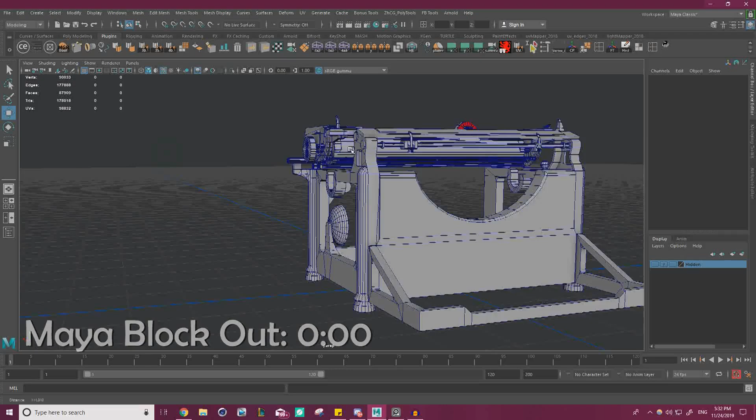We're going to be continuing along creating this typewriter here. It's been a bit of a hot minute since I've recorded the last episode, maybe about a week or so. I did mention in the last part or two that I was starting some contract work that was eating up quite a bit of time, so this is more of a side passion project to bring you guys this tutorial. But it's good to be back.

I had to look over all of my notes on this to remember exactly what we were doing, but we're going to be creating these cylindrical end pieces. They're a little bit different on each end, this side being complex, the other side being very simple. We should be able to get through all of that in this part, so this part might be a little bit shorter, maybe not, but that's the goal. I'm also still a little bit sick, mostly just a bit of a cough, so if you guys could excuse me for that. Mostly over it though.

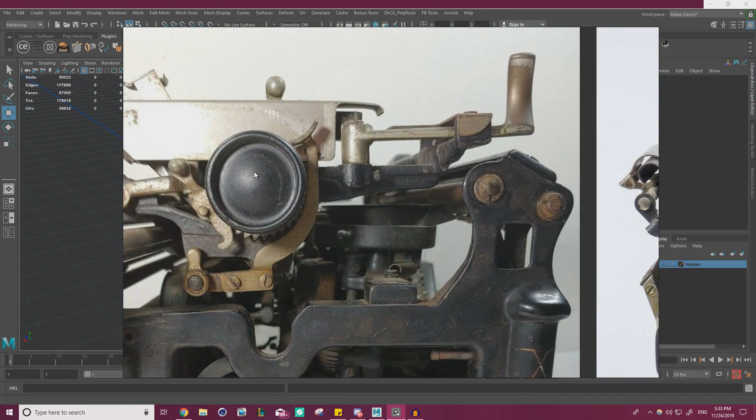So let's go over exactly what we're making. This end piece here, they all seem to be slightly different. The most common one is to have this sort of sharp gear shape, this Coke can looking thing, this ribbed knob, and this end piece - that's definitely the most common one you're seeing here on the end. And then the other side, this is just this kind of rounded knob with the spiked gears.

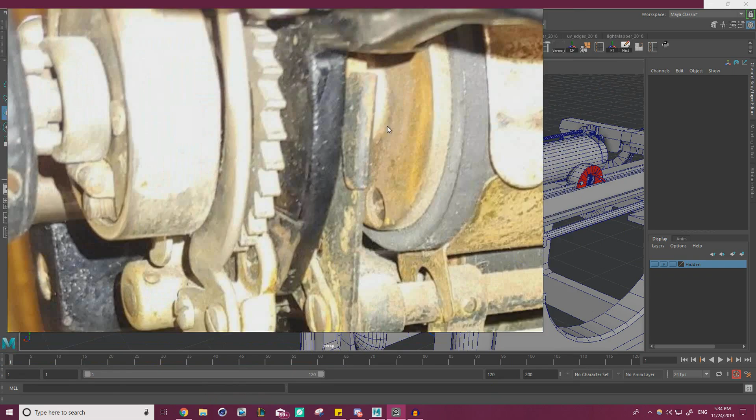We're going to be starting with that spiked piece. The challenging thing is there really isn't any angle that is focused on that specifically, but you can see it peeking through in all of these, and we have little hints as to what it is. This image is really good because it shows us there's an outline with these spikes, but it's hollow on the inside. I was trying to find other reference to confirm that, and you can see it here, how there's sort of a gap. So we're going to be trying to work with that in mind. We can also see the positioning of it relative to the other pieces.

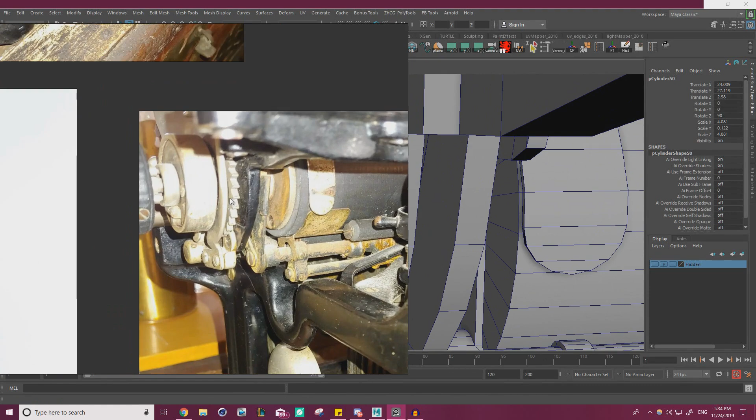So let's go ahead and make that. We can start with this placeholder piece here, and start with this guy. It's definitely positioned between these two things underneath here, which is nice. So I'm just going to duplicate this piece, leave this right there, and try to mirror the thickness of it. It's definitely a pretty narrow piece overall, about that thick or so, and positioned right here.

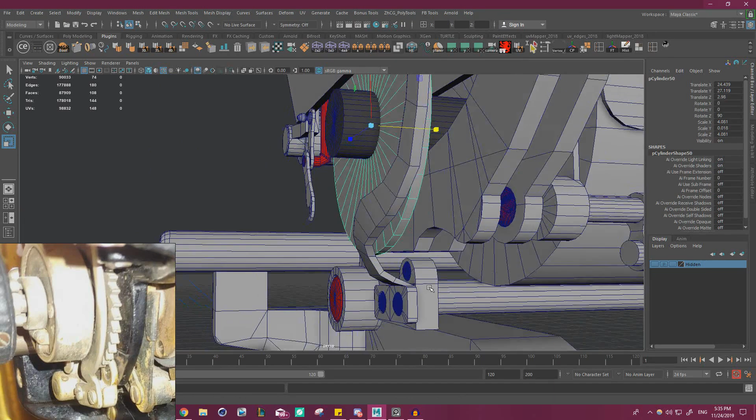Just trying to get the scale of everything. Might as well delete this guy since we don't need it. Let's get the scale of it relative to everything. Honestly, based on where that is and how this is lined up, it's already pretty to scale how it is now. I think with the spikes hanging out, we might want to shrink it down a little bit. And then there's that gap that we discussed.

So how exactly are we going to connect it? Well, first of all, I'm going to grab all these faces and extrude, just extrude these faces in, trying to get that gap there. So it seems like it's deleted like this, like it's just a ring. Where it gets kind of tricky is how does that then connect back to here? We can focus on that afterwards. First, we're going to have to fill up this hole.

I'm just going to select this loop, shift select this loop, and then we can shift right click, bridge. It seems to have not bridged correctly - this will happen from time to time. To fix that, I find that if you just bridge one edge and then go for the full bridge like so, it's smart enough to realize how these are connected. It'll sort itself out around it. So that's how I get just a ring.

So how are we going to get these sort of spiky parts? There's many ways we could do it. One way I would try is maybe to extrude these faces out, and then this might be very cumbersome, but if we then take every other edge and extrude it in - no, that wouldn't work. Let's think about this. To get sort of a spiked look, we could extrude out, and then where it says keep faces together, we can turn that off. I want to see if offsetting does anything. Not necessarily.

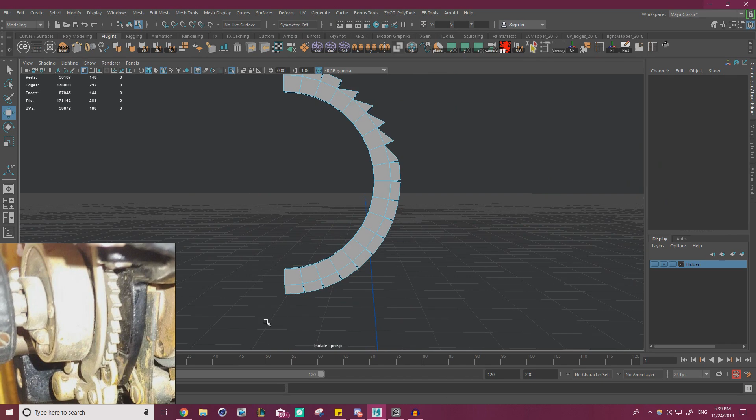So this is exactly cut properly, I think. I guess we'll soon find out. Just continuing along. And this is why using our pivot to our advantage is so important. Just vertex snapping it and moving it down.

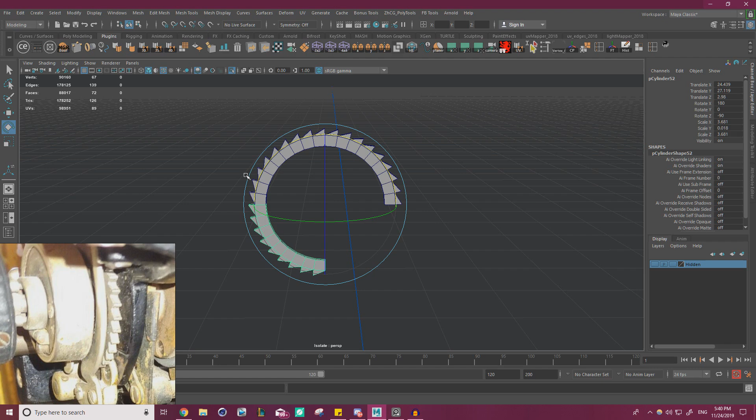And of course we got to merge our vertices. And then essentially we can just duplicate, rotate, duplicate, rotate, duplicate, rotate. Mesh combine on all those guys, merge all those vertices together, and we successfully got that sort of spiky shape that we see over here.

Even might want to make it a little bit thicker. We got pretty lucky, it seems like the amount of spikes is pretty accurate. I was just trying that out and it kind of worked out. But now it's a matter of how do we address this gap, because it obviously can't just be floating for no reason.

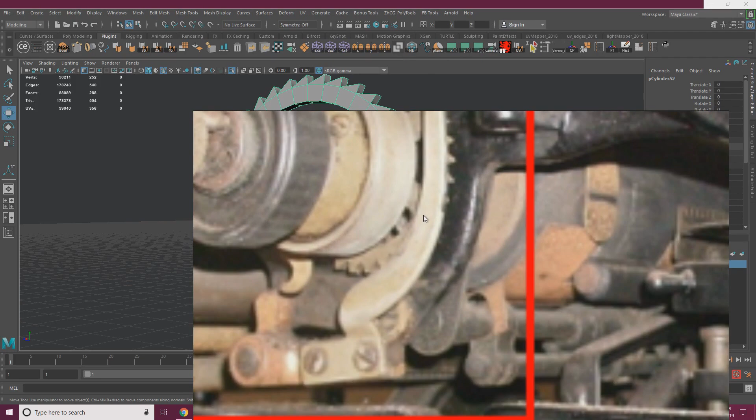Let's see if I can find that original reference. Yeah, it seems like it connects in. Maybe it's like every 3. This part, we're going to have to take some creative judgment to see how exactly it would come together. I'm thinking maybe I'm just doing a pattern of 3 on, 3 off.

And if we extrude that in, we sort of get that kind of shape, right? It does look pretty bad to do it just like this. I don't like these big triangle shapes.

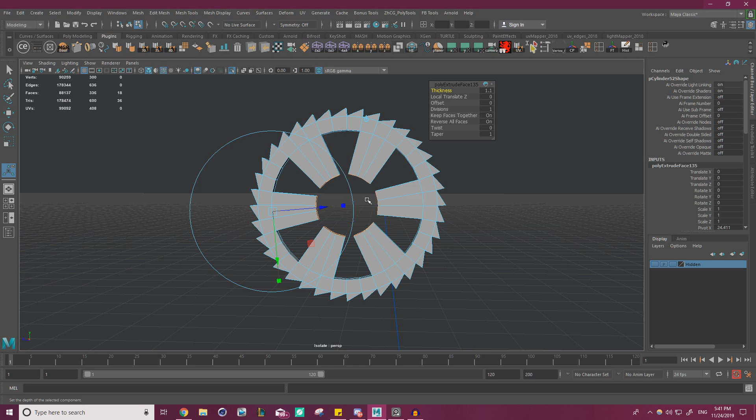Let's try that. I then went ahead and deleted those faces. I want to see, can I bridge these across? I can. Okay, this is starting to look like something I'm a bit happier with. If I connect all of these.

It's more of a proper ring. I can tell it's obviously not as smooth because we're missing some of these edge loops, but I like the concept of this more, at least. I'm just going to go ahead and put a cut in the middle of all these, just holding shift to get it to snap right to the middle.

Cool. And then if we grab these, we should be able to scale them uniformly and bevel them, which gives us the same circular shape.

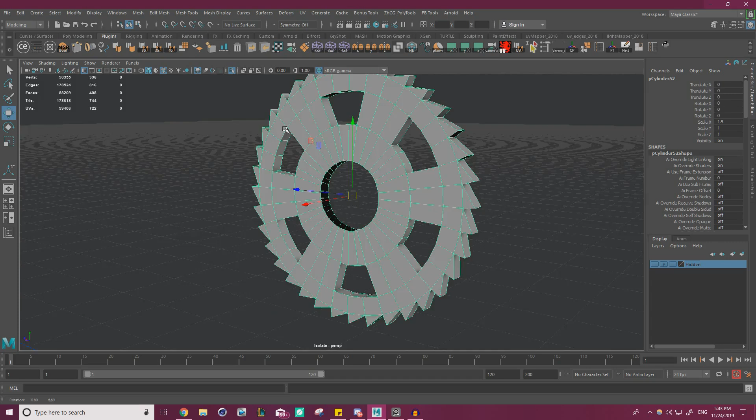Cool, from here all we have to do is extrude in. We can get out of isolation mode and just sort of cup it like so, and bridge it all across like we did at the start.

So that's how I kind of came up with that gear idea. Like I said, we don't have any super clear reference other than there's some sort of connection piece here. It might even look like it there, but there's definitely a gap and it's rather thin. So how accurate is this? It's hard to tell, but I was looking for a while for some proper reference.

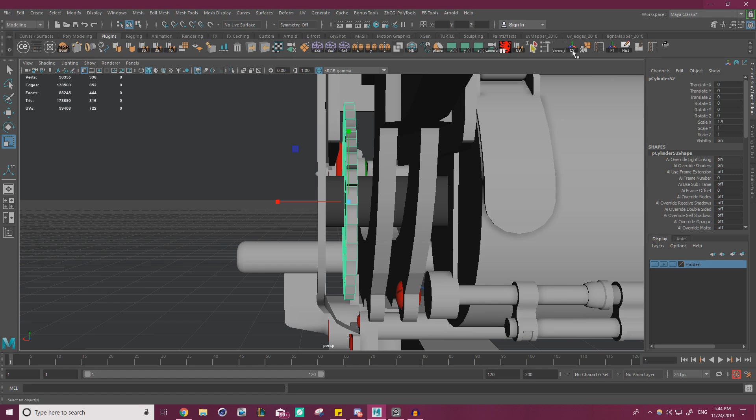And considering how hidden it's going to be, I think that's going to be just fine for this specific piece. Center pivot on that, freeze transformations, delete history. Now we're on to this one. Let's see if we can find some more reference. It's definitely a much simpler shape.

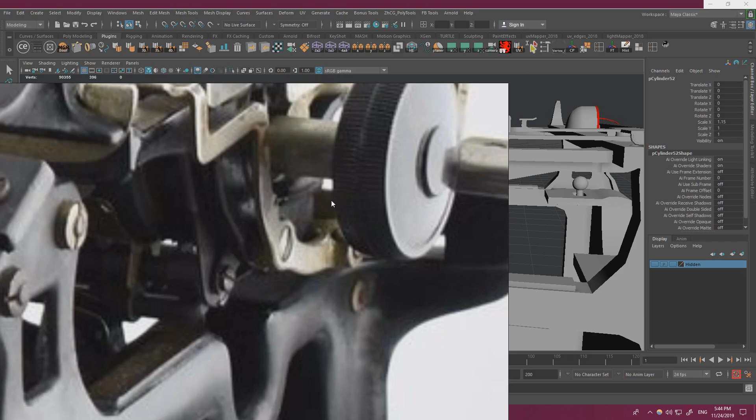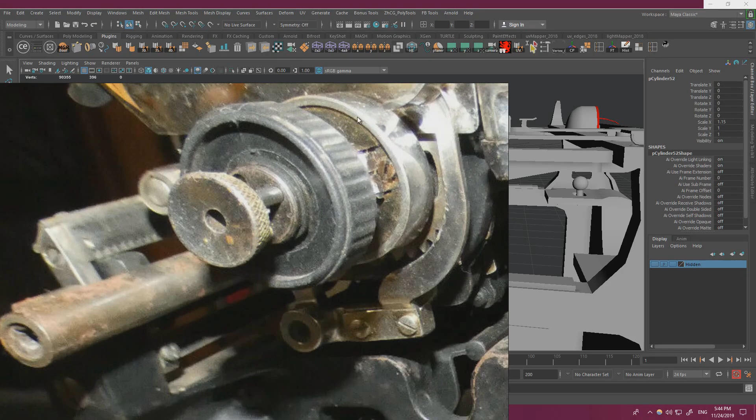Yeah, so it's basically just a cylinder with some bolts in it. I just kind of wish I could see the other side of it, but I guess that's not going to happen. We also know that it is sticking out outside of this guy, and because of that, I might even grab this piece and pull it out a little bit.

So let's go ahead and start making it. Maybe it won't even be a big deal that we can't see the back side of it because it's pressed up against here, and the only way you could even get your camera in there would be to jam it right here, which isn't really going to be possible.

So I'm going to want cylinders, a cylinder that's equal to this, so I'm going to be using our good old favorite Smart Duplicate Face. So we have this guy to work with. I'm going to turn the color back to the original and scale them up a bit. It seems like all of these pieces are more or less the same scale.

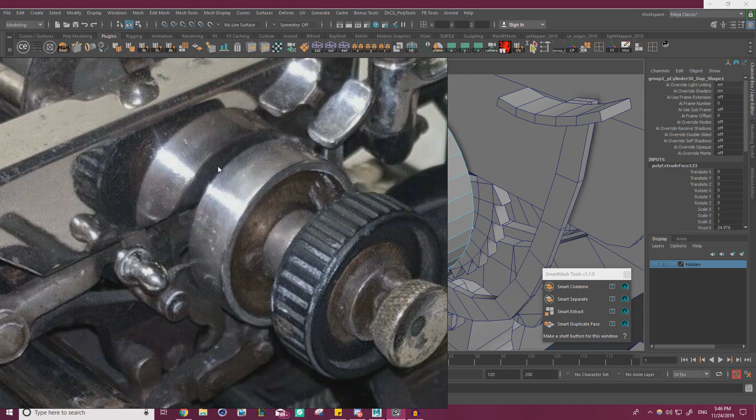So let's try and match this more or less. We're going to need to extrude it about this thickness, which looks to be about so.

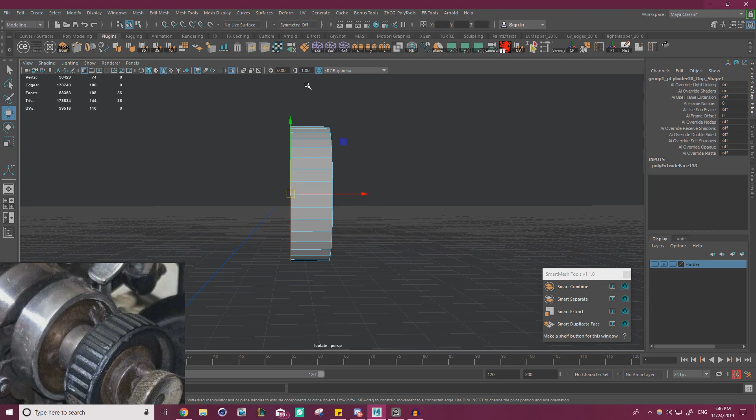I'm going to isolate it just to make sure the back, yeah, I thought so. Whenever you're extruding from a plane or a single face like that, or something that isn't three-dimensional, sometimes you get these, so I'm just reversing the normals because you don't want it to be staying black like that. It's going to give you some funky results later on.

The next step of this is to sort of punch it in a little bit. So I'm just selecting these faces on the front. Once again, to do that, I'm selecting one face, shift period to grow selection, and then just deselecting the extra stuff there. Control E to extrude. We can then just sort of scale this in with the handles.

Going to extrude this in, trying to mimic about how far deep that is. Doesn't seem to go in too far. About so, and then it seems to sort of cup up. It's like concave, like so.

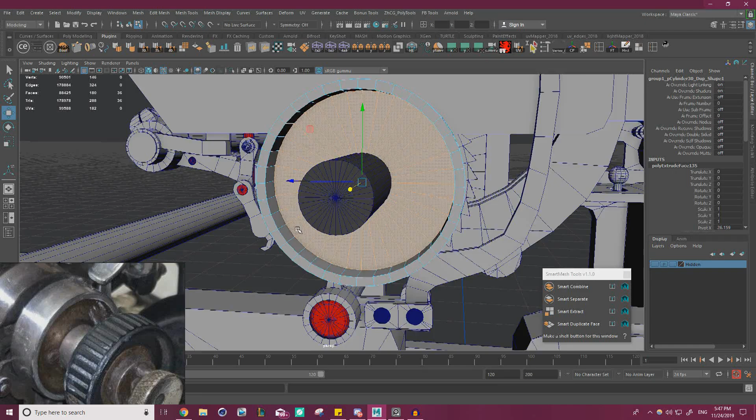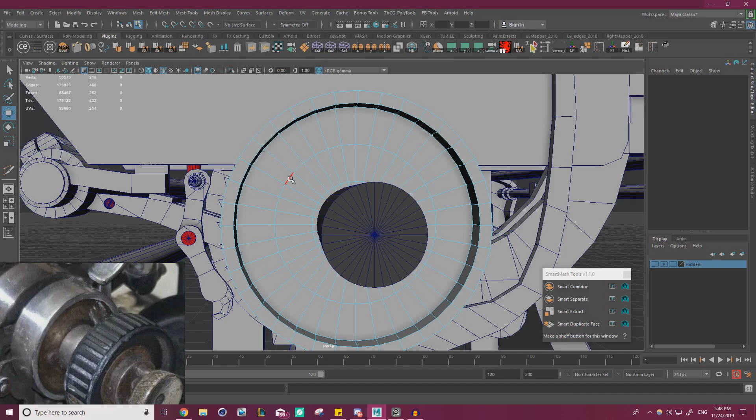So maybe the best approach would be to put it not as far as I'd initially like, but then once again extrude like so, and put a cut in the middle. This way I can pull this back so it sort of dips in a little bit. Maybe even pull this one forward, and then just bevel this guy. Maybe add 2 segments in there.

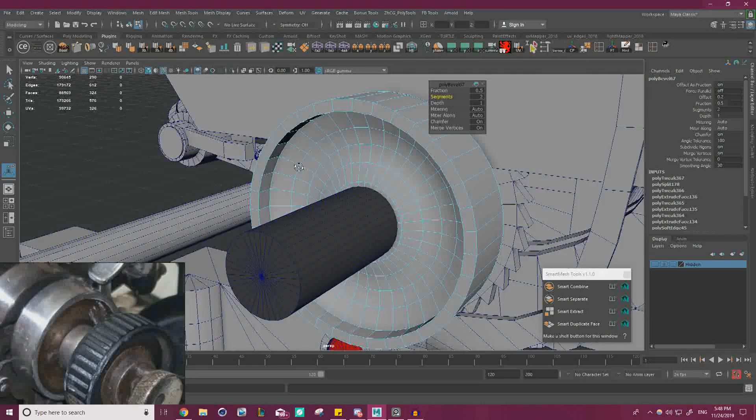Just going to play with the distance on all of this stuff. Yeah, that seems to match it pretty well.

I am going to want to hollow this part out. It seems like this tube is going through it, not pressed up against it. So I'm going to select these faces, Control E, extrude this in, and then holding Shift, I'm going to push it back, which is just essentially extruding it back, like so.

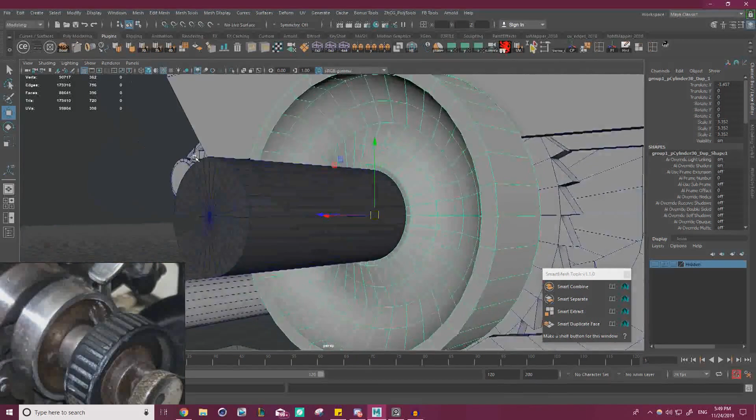In fact, if this pipe is going all the way through, it'll probably punch through to the other end. So I'm thinking if I should just ram a Boolean through instead. I'm going to Control Z all of that, and smart duplicate this face, scale it down a little bit.

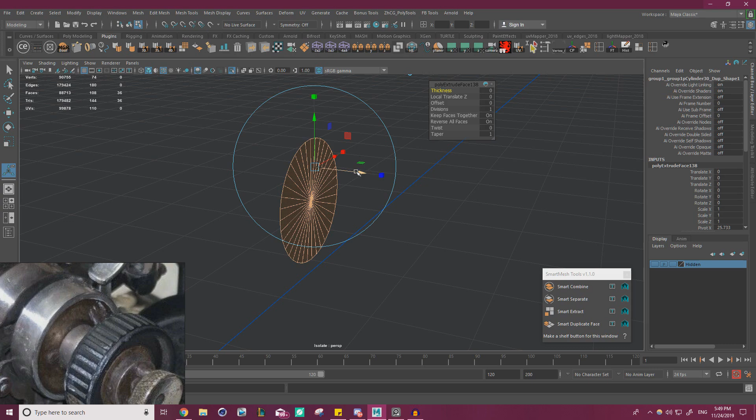So it's sort of hugging the pole. Let's isolate this guy and make it 3-dimensional by extruding. Nice. Yeah, we can use this as a Boolean. So let's isolate these guys. We're going to want to punch it through.

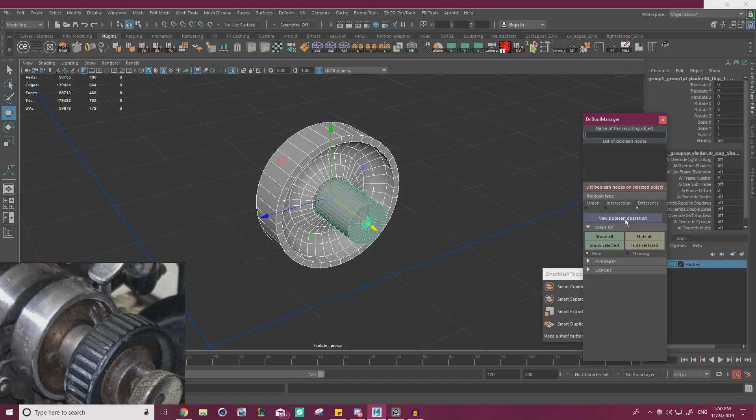And this should be pretty seamless since this is all lining up perfectly. Freeze transformations, delete history, but let's go ahead and save anyways, just to be safe. Okay, so we can go to our DC Bool Manager, Shift select on our cutout mesh, make sure it's on difference, and delete history and base objects. Just to be safe, I'm going to merge these vertices, and we should be good to go. Let's auto smooth that.

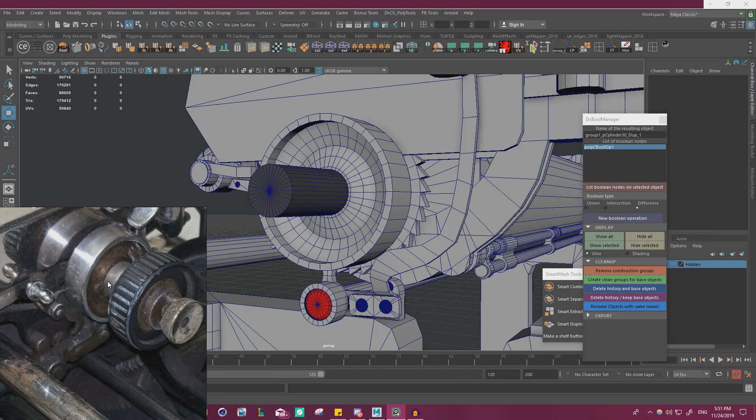Nice, we got that. It does seem like there's some screws being punched in. I want to see a bunch of different reference on that. It seems to be slightly different for every single one of them.

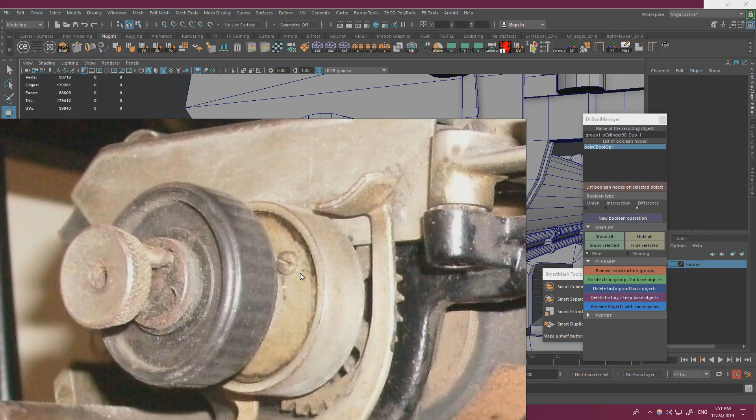Yeah, just like some bolts sticking through. They might even not have a big cutout behind it, so we might even not have to use a Boolean for that. Just want to find another one just to confirm that's the actual look of things. If we can find one here.

Yeah, it just kind of seems like it's more or less resting on top. I guess that's going to mean we're going to have to adjust this a little bit. It's a little bit of a harsh transition. Because if we're going to have bolts resting on it, they can't just kind of be floating unless we do cut into it, which I'm thinking might actually be the better idea here.

I'm going to select all these guys actually and scale them down so it's not as much of an extreme transition.

And you know what? Let's go ahead with the Boolean and cut a hole into it and then fill it with a screw. That way it's just easier to maintain. It has a proper home, and it has a nice clean bevel around it when we bring it into ZBrush. So it'll be easy to produce. All we have to do is make some cylinders.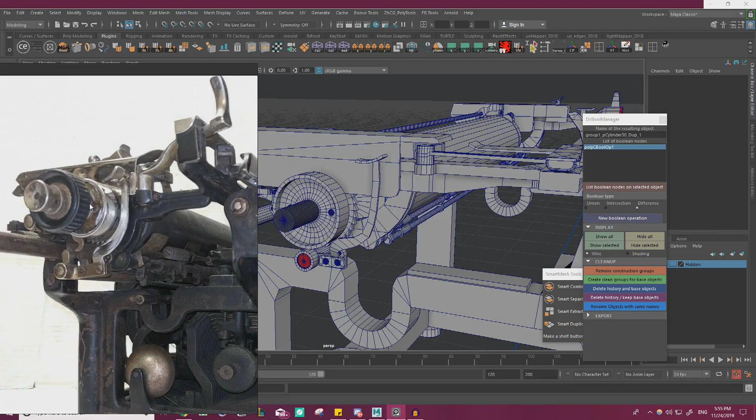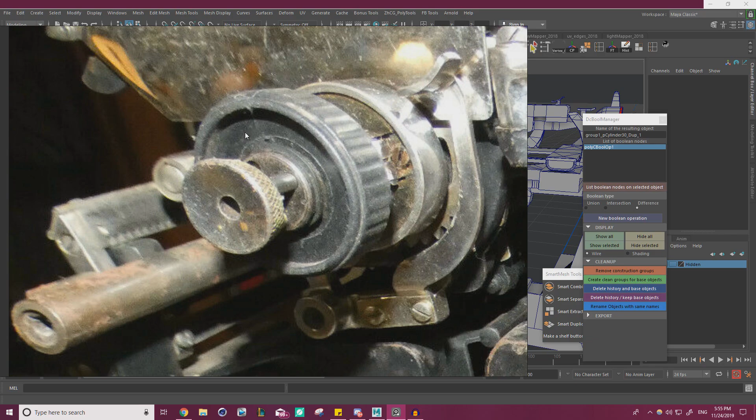We're on to this ribbed one. Seems pretty simple. Let's see if we can find more reference of it. This one's definitely the easiest to see since it's all the way out. Oh, this is actually a good reference for it. It seems a little different, but basically the same concept. This one is very similar in shape, seems to be the same size. The only difference is this ribbed grip pattern, and the material's a bit different. It also has these plastic imperfections.

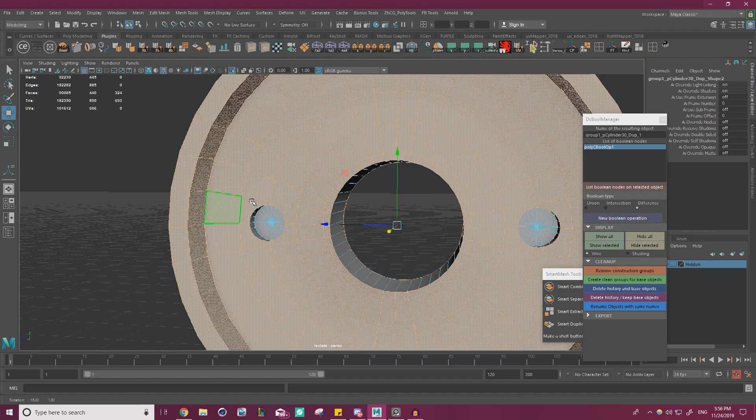Let's simply start by duplicating this guy. It does seem to be a little thinner, and I might even argue it's a little smaller in size as well. We are going to have to make some changes to this. I'm going to go ahead and gut all these components in the middle, just because this stuff's overcomplicating things. So let's just delete all of this. Delete these guys. This back can stay the same, but I'm just going to want to bridge these over. Might even delete that. Select these faces and smush them down so they're all even.

And that's more or less the general shape of everything. This seems to be smaller. And since we scaled it down, we're going to have to bring this back up and around. But the main part is the outside, the ribs there. I also kind of want to get this ring before we move any further.

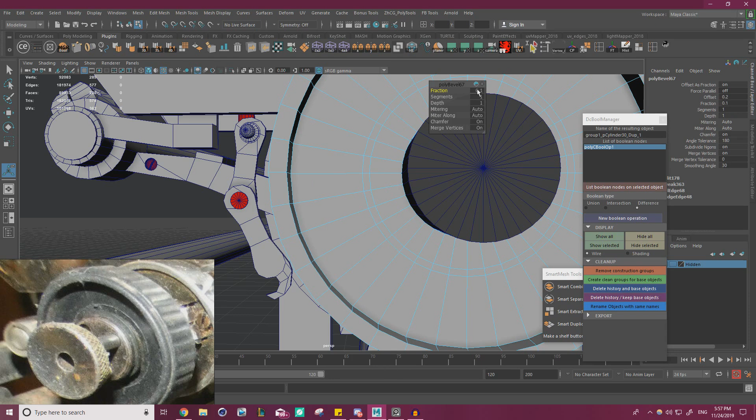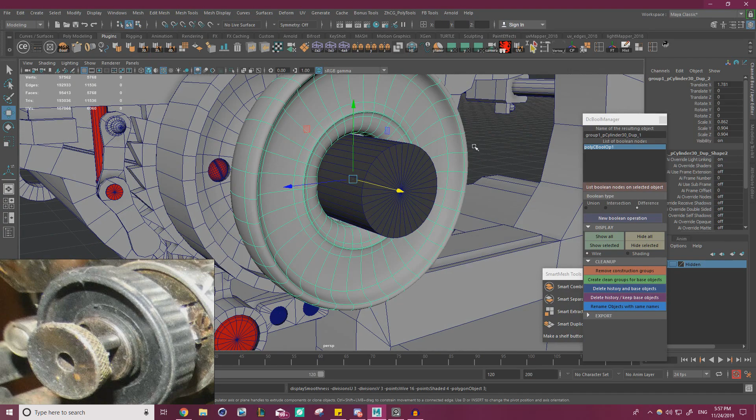That's going to be pretty easy to produce. All we have to do is add an edge loop, bevel it, and make it really small, maybe 0.05. And then just extrude it out, or maybe Control E rather. Give it some thickness. And then add an offset of something really small, like 0.08, 0.01. Yeah, and then just let it go like that. That way when we soften it, it's very subtle, but that ring will definitely be there.

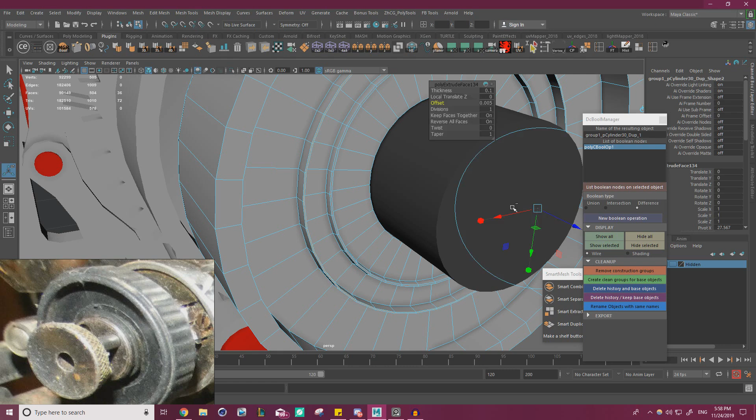And you can add a couple of those. They're just going to be stuff we're going to bake down. It's not actual geometry, but it's just a really quick way to add in some extra detail. I might go ahead and add another one in actually while I'm at it. 0.05. 0.005. Okay, cool.

Right, so this has a bit of a lip to it before it has the ribbed part. So let's go ahead and add that. The easiest way would probably be to add a cut here and then extrude all of this out. That way we get that sort of stepped lip. And then to get the ribbed part, that's really easy. It's actually kind of similar to how we did this gear looking thing.

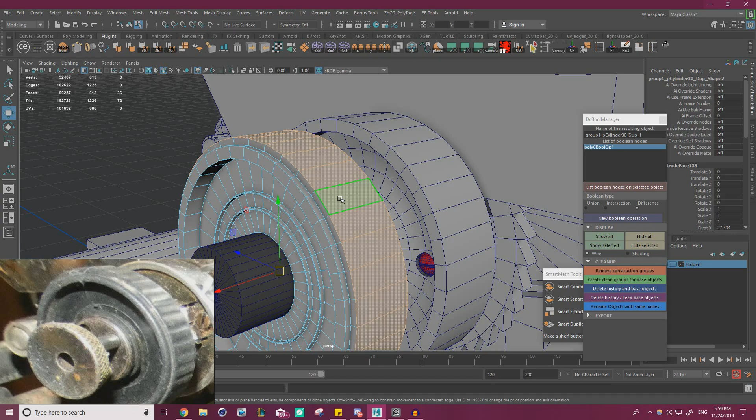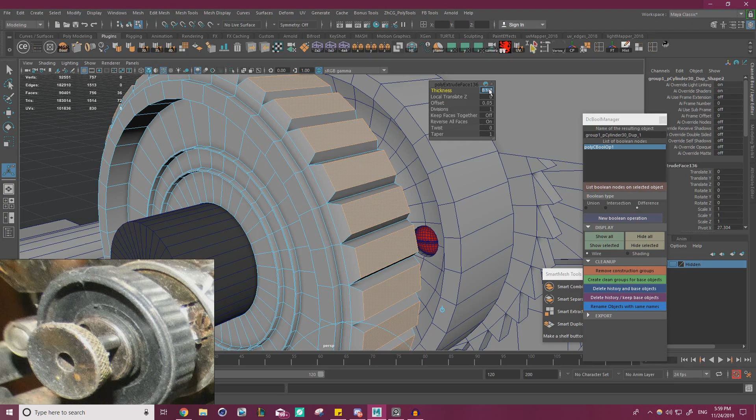I'm just going to extrude these faces and keep faces together. Just going to turn that off and affect the offset. Make it very subtle, like 0.05. And then we can turn the actual size of the extrusion down to like 0.05 as well. We already kind of got it. Let's change the offset to maybe a bit more, 0.075. And then since we have all of them selected, I can just scale it out a little bit. And that's the ribbed one for you.

If we smooth it, this is obviously not an accurate smoothing, but it's still getting us the shape, pretty much exactly what we're looking for. So when we bring it into ZBrush and we have more control, that's going to be looking pretty good. So that's essentially that piece. All we have to do is cap it off with that metal component at the end there, and then we can switch things over to the other side. The other side will be much, much quicker.

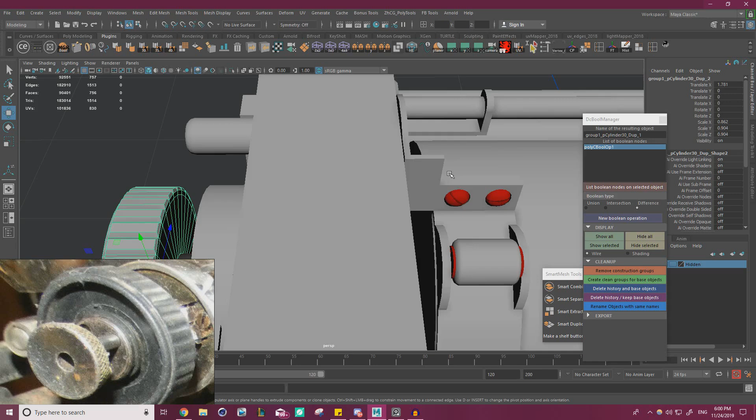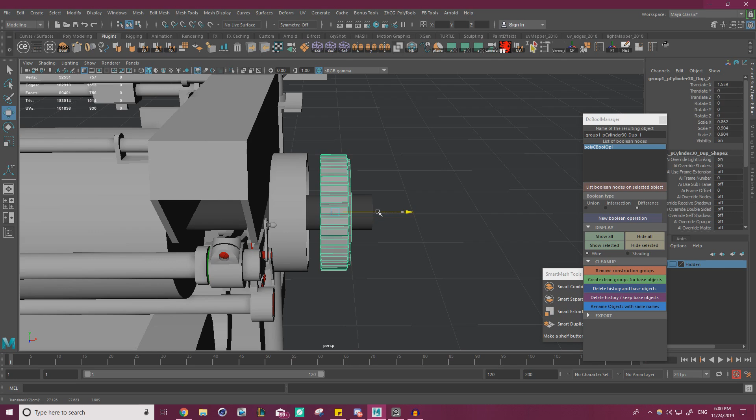Before we do so, I'm going to tuck this in a little bit more, like so. Just want to get a good understanding of how much space is in between. I guess there's a bit of space. And this one might even seem to come across a bit thicker.

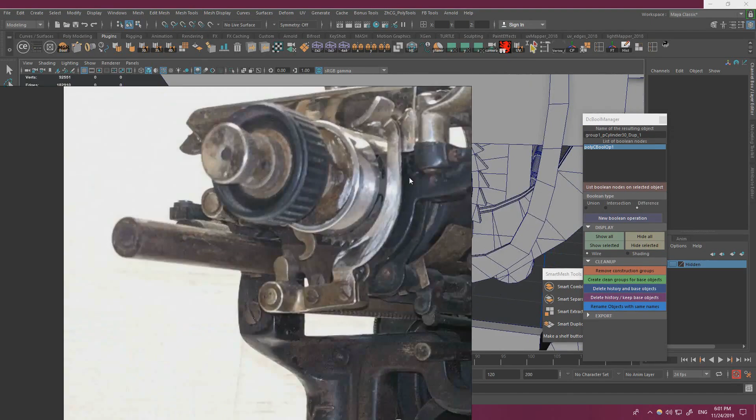Let's work on that metallic piece. I'm going to start off by smart duplicating this face. Let's go ahead and isolate that guy. Scale this down. I should just really be keeping this on screen.

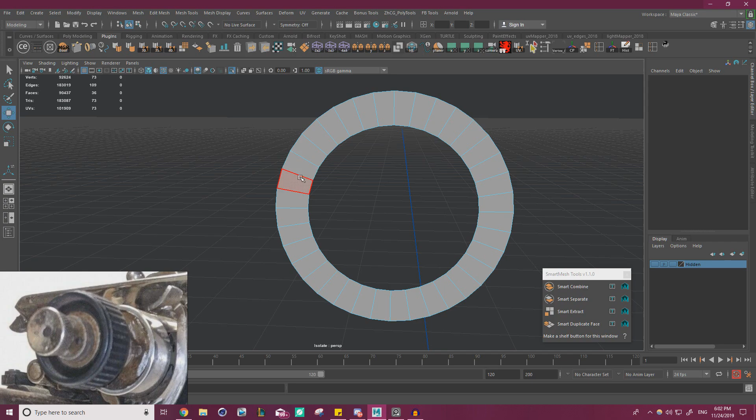Going for this sort of rusted piece. But we can extrude this out a little bit. Let's make sure the other side isn't inverted - it is.

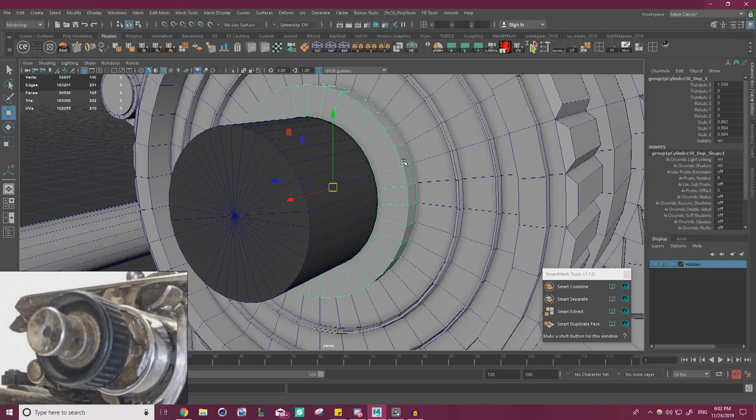Now I'm trying to figure out if this cap is part of this here, or if it's something different. I'm going to assume it's something different.

I'm just going to actually take this and shove it back in here, because when we look at this guy, yeah, it's going all the way through, but that's a lot of texture space it's going to be taking up for doing essentially nothing at all. Visually, it's not really doing a lot. Like we can see it here and here. It really makes me want to just cut it off here.

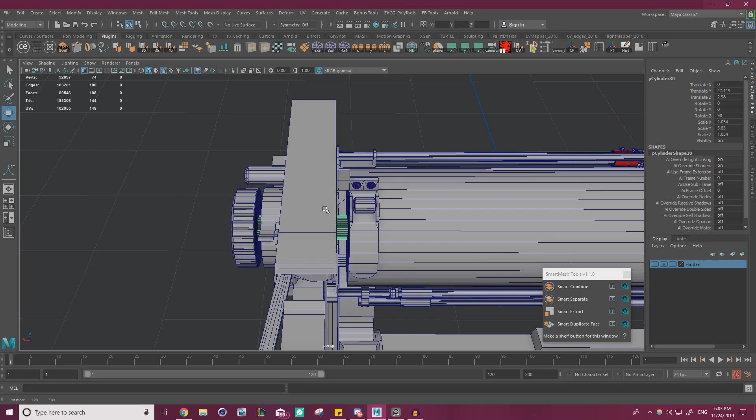In fact, I'm actually going to go do that. So I'm taking this piece here, and I'm taking these ends. I'm going to extrude them in, and I'm just trying to match this size. I can go ahead now and delete them.

And bridge them across. The reason I'm doing this is just to get that bevel. This, of course, is not going to be in the final model whatsoever.

But it also means I can now take this, cut it, snap that to the end, and we can just cut and delete everything that's in the middle where it's just not visible at all. Like we don't need that. This is taking up a ton of texture space, and it's just never going to be seen.

So let's delete that. We're now, of course, going to have to cap it off on both sides. Cool.

And that takes us back to this guy, which I'm saying is a different piece. Having it being bolted down makes me feel that way, because this piece in the middle would be so secure it wouldn't need to be bolted down for any reason, unless the reason it's bolted down is to connect this, but I don't think it warrants its own bolts for that.

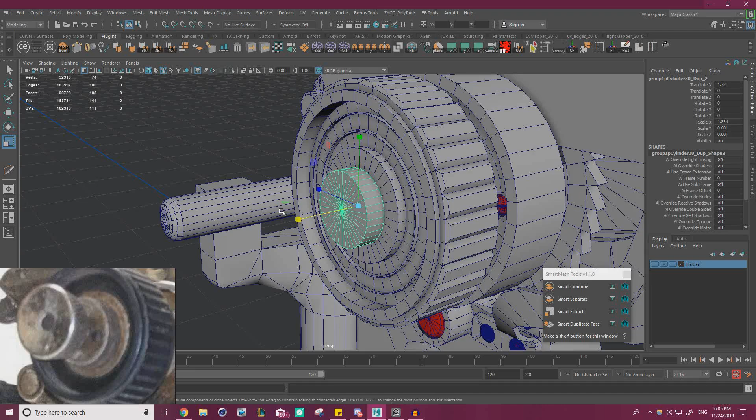And I just want to be covering over this black spot now, and mimic the size of this. Seems to come out about so.

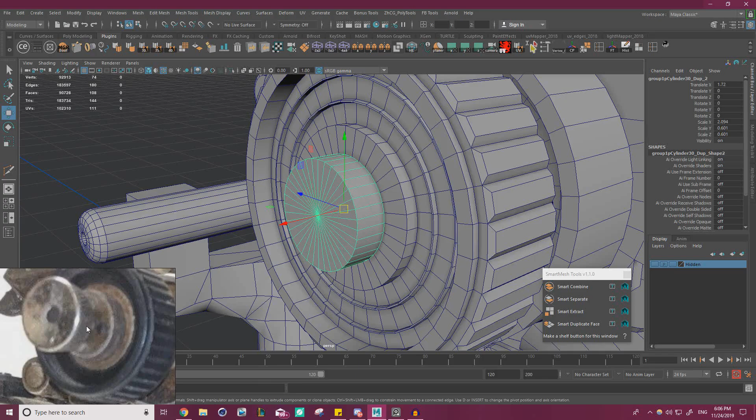I just want to see how this is connected to the piece in front of it. I do see the bolts, which we'll be adding. But I feel like there was other reference that did a good job of showing the connection between those two. Yeah, this was a good one.

So I think that's where the bolt was in the last one. Is there something in the middle that's connecting them? Interesting - this is why it's so important to find multiple pieces of reference. Yeah, see, this one looks like it's being connected in 3 places, and then there's bolts in the 3 missing places. That's how I'm interpreting it.

So that's exactly how I'm going to go about that. I also kind of like how this one has a hole in the middle and it's kind of ribbed. It's just more visually interesting. So I'm going to mimic that.

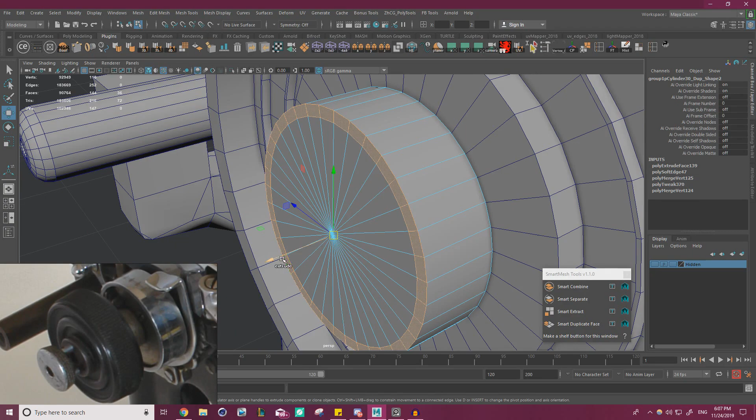Start by ribbing it. I'm going to extrude in a little bit and just extrude that out. It's easy as that to get that detail. We can then delete that unused edge loop. And then we're going to need 6 holes, 3 for bolts, 3 for connecting to this dial at the end.

Pretty simple, pretty straightforward. I actually want to thicken this up a little bit, and then one hole in the middle. The hole in the middle we can actually make right now, just by selecting all of these, extruding this in, and punching through. I'm just going to leave it like that.

Like people are never going to look down that, so it's just going to be normal information anyways.

So right, we're going to need some cylinders to punch through. Let's isolate this guy. Create polygon primitive cylinder.

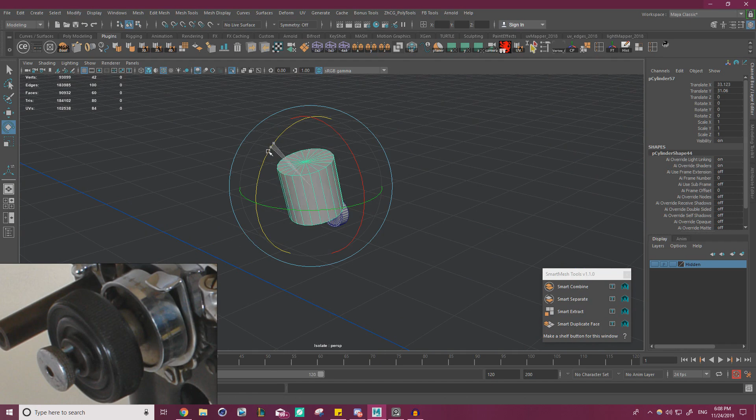Rotate 90 degrees. I'm going to snap it directly to the center for now, then scale it down. To get it directly in the middle, we can add an edge loop and snap it to the 50% point.

Then we can just sort of scale up. From here, we don't need this edge loop anymore, so we can delete it, control backspace, and move our pivot to the middle. Control D, rotate here, Control D, rotate here. I'm just trying to get this to be triangular.

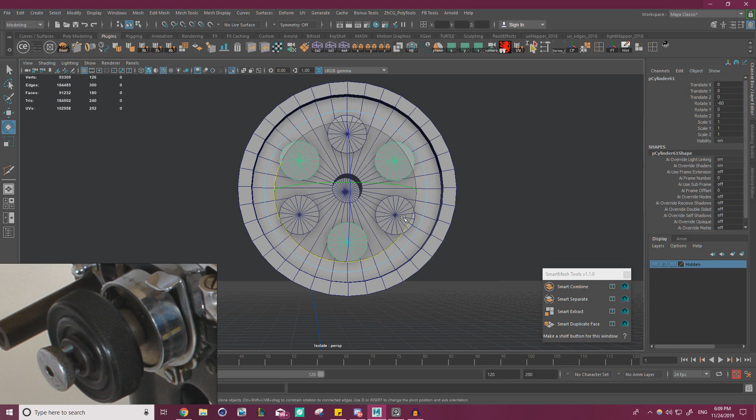More like that. So then we can mesh combine. I feel like that's not perfect, because if we... yeah, that works. Just gonna scale this up a little bit.

And I think these are too big. I don't want these to cut as much. So I'm going to use something we've done before where we select all the vertices, and in our move tool settings, we can go to normal and drag in where it says N. That's going to sort of squish everything in uniformly, so it's a bit smaller in size.

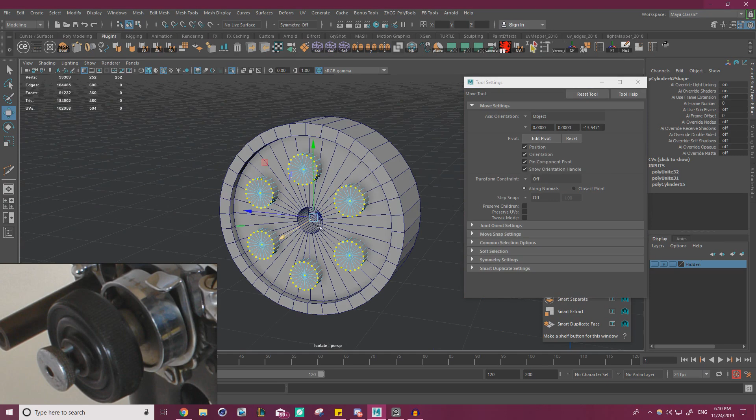Nice, we can Boolean this. Thank God this is all just going to be normal information, because trying to make sense of this geo would be a total nightmare. So we're in luck in that sense. Let's go ahead and delete history, freeze transformations, and set up our Boolean.

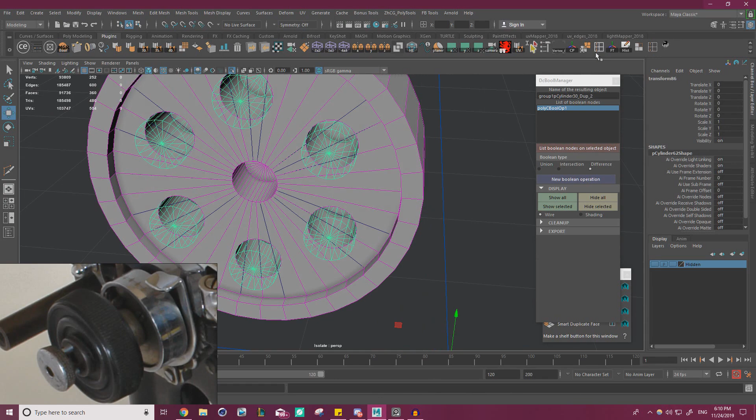Click, shift click, new Boolean. I'm going to drag it forward quite a bit, and delete history and base objects. Cool.

We're going to want bolts in here as well. Just duplicate from a pre-existing one. I'm going to set my move settings back to world, just vertex snapping that guy into place. That's a pretty cozy fit already, which is nice.

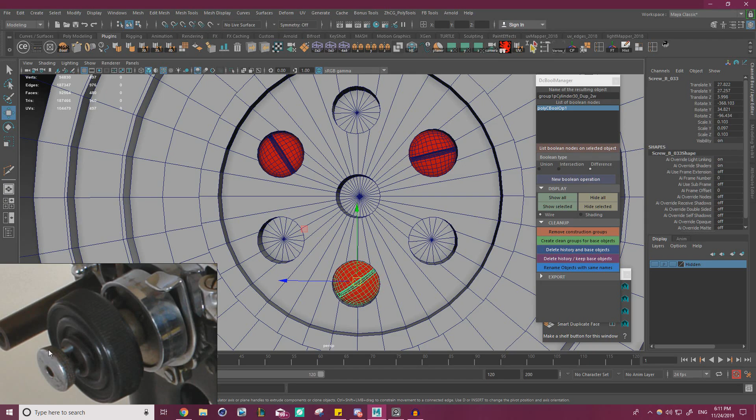Cool, so that's that. We're just going to have to get these basic cylinders in. That should be pretty easy, and then that sort of twisted knob at the end, and then we're already onto the other side. So we're making some pretty good progress pretty quickly.

With this piece complete, we're just heading to the back and we're going to fill this guy in, which is definitely a good feeling. So let's finish this guy off before we celebrate too early.

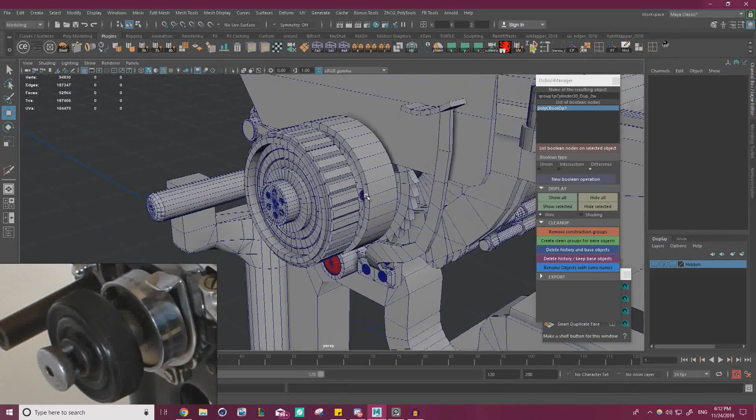Going to duplicate this guy over again, do a very similar method as before, where I delete these, merge to center, merge to center, and this one's cool, it's a bit thicker, like so.

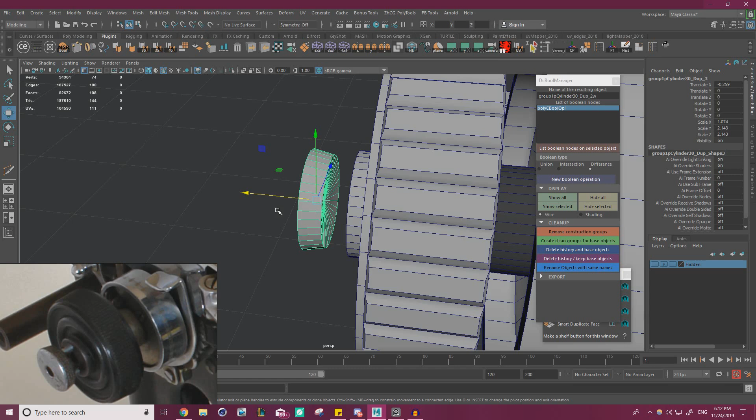It's about the same size as this, but it's tapered, so this sort of comes in a little bit. It's about that far away. This vert seems to be unaligned. Let's just snap that in.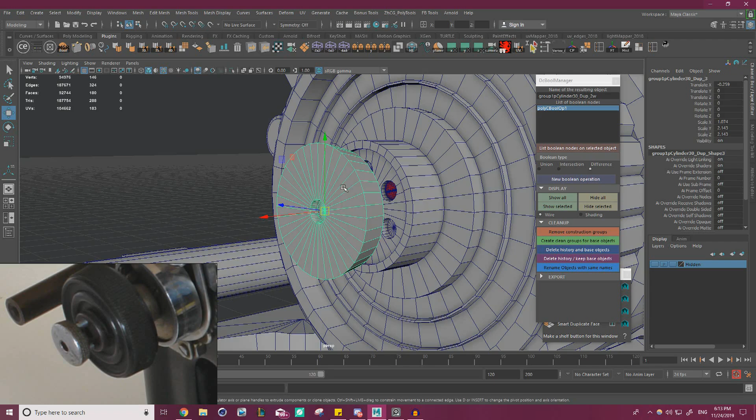There's a hole, so we can go ahead and get that just by extruding this in. I'm just going to make this normal information, so I'm not going to actually punch it through. If you're wondering when to make it normal information and when not to, it's mostly a scale thing. Like, this is such a tiny hole on such a more complex piece. Adding physical geometry to punch a hole through where no one's really going to see is just not worth it. So that's why I'm choosing to make it like so.

I'm going to taper the end, and we're just going to use cylinders connecting from here to here. We'll never see this side of it, so I'm not worried about cutting in. And the only other thing is this definitely has some sort of grip on it, but that's...

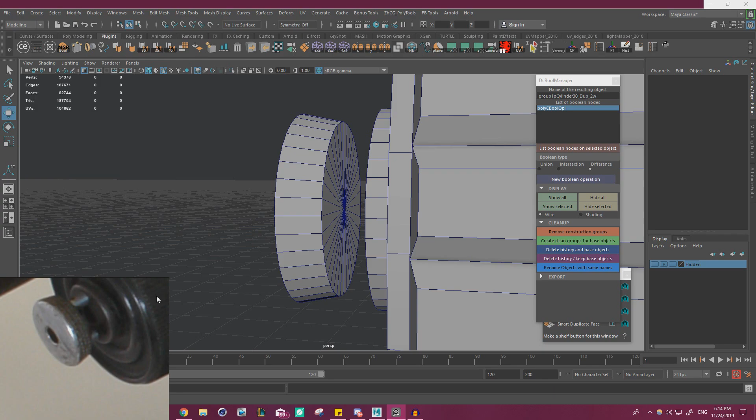I don't even know if our map will have enough resolution to pick that up. Either way, I don't think there's a lot of point in modeling that in. We can add that in with a texture very, very easily. Modeling would take quite a bit longer, so I'm going to leave it smooth for now.

Let's smart duplicate this face, extrude it forward, clean up the stuff on the back. It's all black.

Flatten this out. We can just go ahead and snap it here. This should already be aligned. Gonna scale it down a little bit.

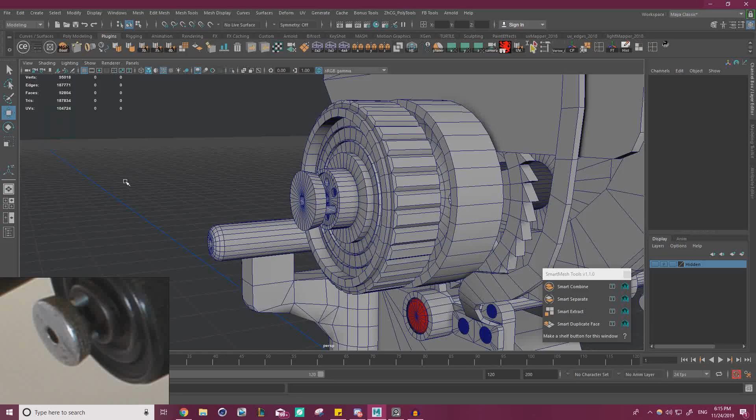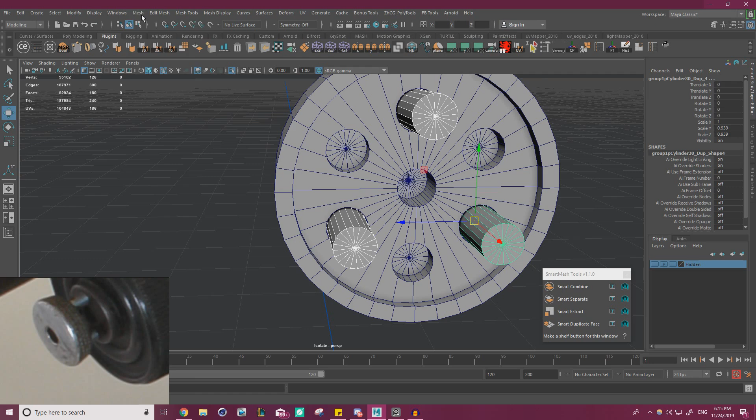But from here we can just sort of duplicate it around. Just gonna move the pivot to the end so I can just Control D, snap, Control D, snap. We might as well make these one mesh because they're never going to be separated.

Cool, that's the entire end. We did that pretty quickly, went through a bunch of different techniques as well. Let's go ahead and save, and we can tackle the other side now.

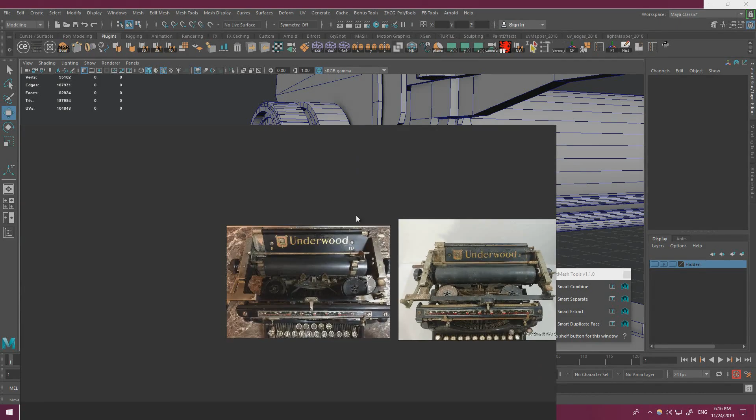I'm trying to find a good reference. It has kind of a ribbed dial as well, and it's definitely domed over on pretty much every single reference, so that's a really easy shape to make.

I just want to see what's going on behind it, if we can see any details, or if it's just going directly into there. It kind of seems like that. This is a pretty good photograph of the angle we're looking for.

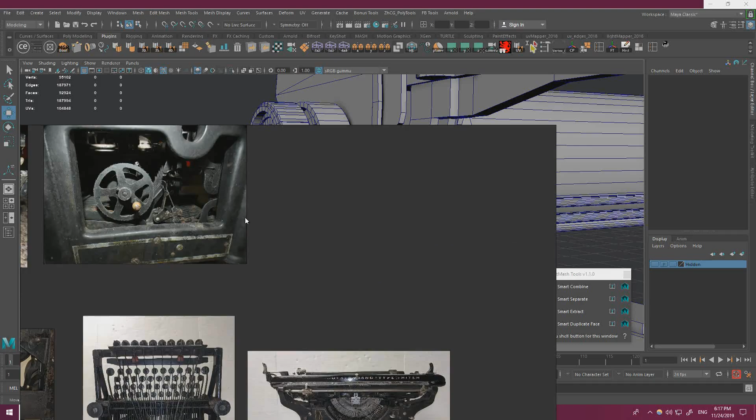Interesting, yeah, if it just connects in, it just connects in. I could have sworn I saw a different photo where it had that sort of sharp geared shape behind it as well. But all these references are kind of saying otherwise, which, hey, that saved us a little bit of time.

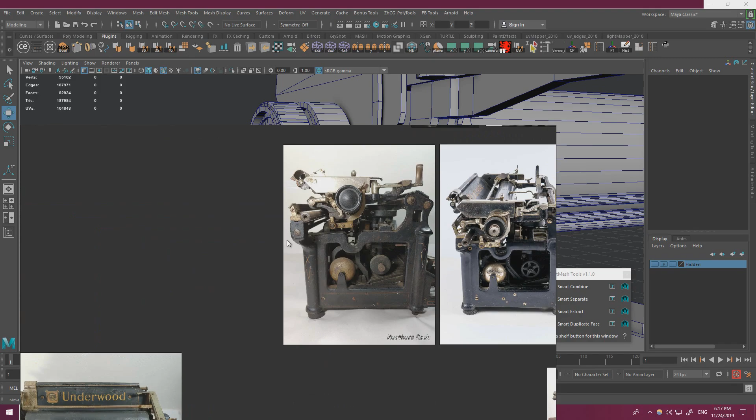This is actually a really good photo for inner reference. And it's kind of hollow on that side. Okay, well, if that's just the way it is, that's the way it is, right?

Cool, that shouldn't take too long to make. In fact, we can probably copy this over and reuse like 99% of it since it's going to have that sort of ribbed end on it. We can just rotate 180 degrees and just sort of gut the inside of this.

Let's start by cutting this halfway through, because we do still want it to go in a bit. That bar has to go into something. Now we can merge that to center, and fill the hole here to sort of cap it off. I'm gonna poke face as well, just because.

We're gonna get rid of these pieces, grow selection and delete. Delete that. Let's go ahead and bridge these across. That's not correct. Let's bridge one across and now bridge across, and it works. So we can delete those essentially, but we're just trying to create this rounded piece.

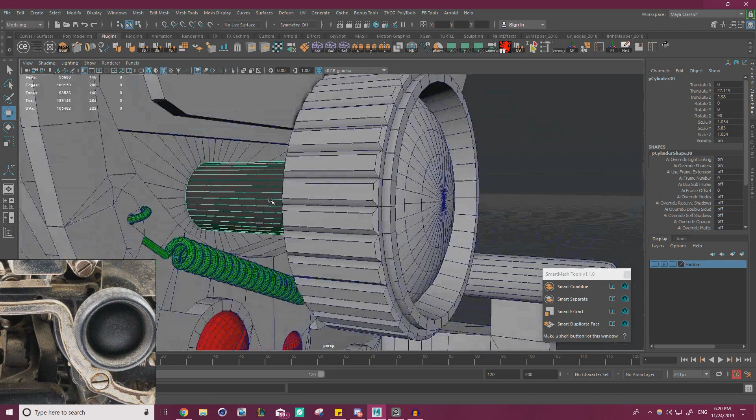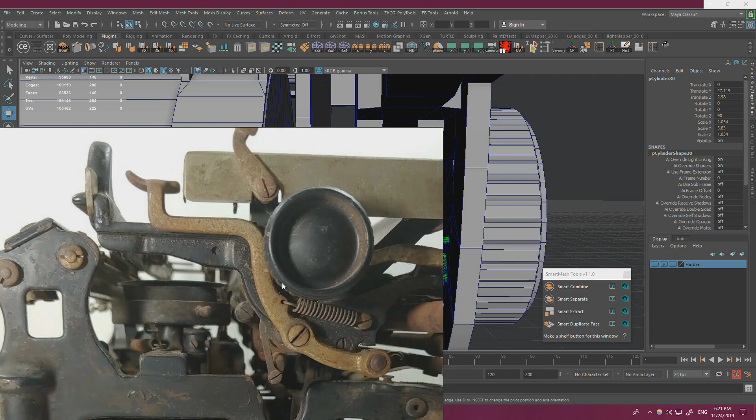But this is kind of resting against here. It just feels awkward having nothing there, but none of the reference is showing anything really there.

This is a good time to bust out the 3D scan. The 3D scan is also kind of what helped me identify where this was placed and that it was behind it, because, I mean, as you can tell, it's very muddied. But yeah, the scan just shows it going directly into there, so you can't really fake how that looks, I guess.

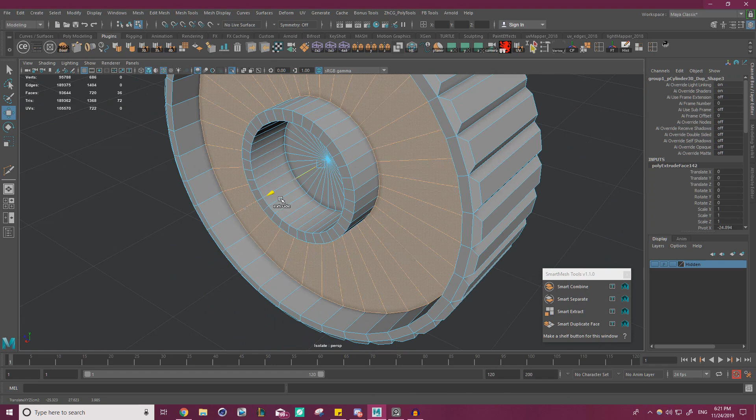Maybe we can make the back of this look a little bit more interesting. It seems to be a bit more hollow in some of the reference images, so maybe even just extruding this in, concaving it in, and beveling that just adds a little bit more visual interest.

Yeah, I guess that's that as far as those dials and knobs go. I think that'll probably do it for this part, but that finishes this page for us.

We do have to make this connection piece, something we forgot that was attached to this guy, we forgot to add it before. But with that done, we loop back here and we're just sort of adding these back pieces - adding in this ruler, adding in this Underwood tag - and then those should be relatively quick, and then we're diving into the guts of things.

That's kind of scary, but if we've made it this far, everything else should be fine as long as we continue with the methods we've been using, sort of breaking things down to their most simple, primal, basic primary shapes. It should be relatively simple.